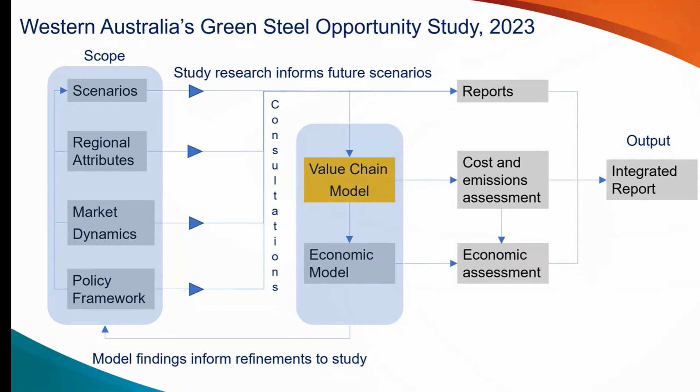We needed to build in as much granularity as we can in the steelmaking process in our model, as much as practical anyway. If we don't do that, we will not be able to estimate production costs, current fuel usage, potential decarbonisation opportunities, and looking at the emissions reductions within those steps.

So we included the steps that you see in this diagram, all the way up to crude steel making. The reason for us not including finished steel products is that finished steel products are wide and varied, and they were not a focus of this study.

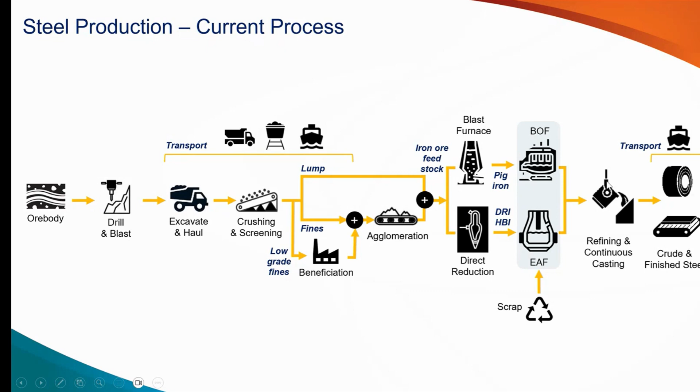Now, with this value chain that you can see, moving from left to right essentially increases the value of the saleable product. And we can think of this as comprising of four markets: mining, iron making, steel making, and transport. The current WA value chain ends at the red line that you see in the screen with DSO and magnetite concentrate exports. In fact, one could say that there's relatively little to no value adding done in WA.

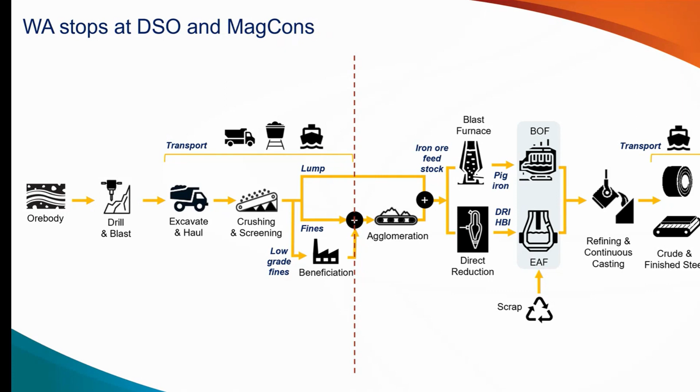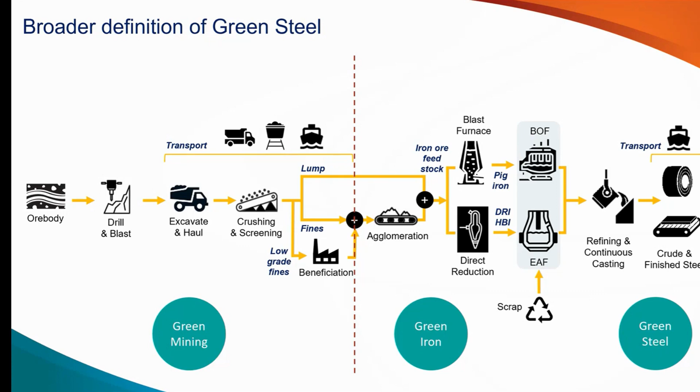For our study, we found it useful to use a broader definition of green steel. To begin with a general or broad definition, green steel is a process whereby steel is produced using renewable energy, that is, with an elimination or reduced use of fossil fuels, such as coal, diesel, oil, and natural gas. Now, having a broader definition allows us to explore as many opportunities as we can for Western Australia, and our broader definition includes green activities in the entire mining to steelmaking value chain.

This schematic here shows how fossil fuel intensive the whole steelmaking process is. These icons that you see there are power, electricity typically generated by gas-fired plants, diesel, and in the case of shipping, bunker fuel. Coking coal is used in iron making, and natural gas is also used throughout the process. Mining, of which we're focused on initially in Western Australia, is very much dependent on diesel.

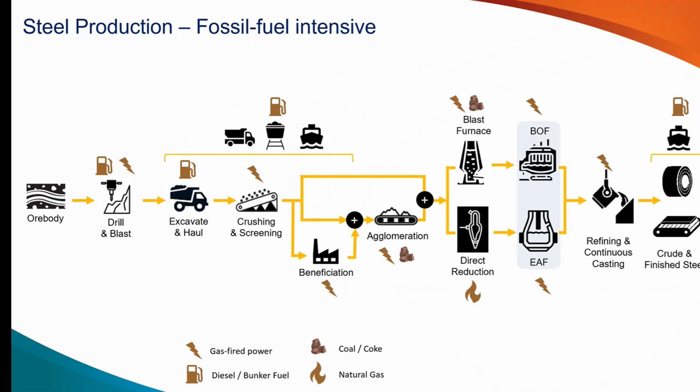You can think of the transportation of ore from the mine to the port, through distances of about 350 kilometers, and that uses diesel. Now, when it comes to iron making, blast furnaces are very much dependent on coking coal, and many parts of the value chain are dependent on electricity, which is traditionally supplied by, as I mentioned, gas-fired plants. Now, with freight, there are long distances in the transport of iron ore from places like Ponta da Madeira in Brazil or Dampier, and they use bunker fuel.

Now, this chart will be repeated in Dave's part of the presentation a little bit later, but I thought it would be useful to mention that the steel industry produces about 7% of global emissions. Here in this waterfall chart, it shows the emissions that come from the entire steelmaking process. An estimate of the blast furnace, basic oxygen furnace steelmaking emissions intensity is 2.1 tons per ton of steel made.

Now, by far, the largest share of emissions comes from the integrated steelmaking part. And within this, the lion's share comes from the use of coking coal in iron making. Now, this diagram also shows how much or how little WA can move the global needle if we only decarbonize mining. Now, the question is, can we make a difference by moving to the right and using our vast renewable generation capabilities and investment capital to help the world decarbonize?

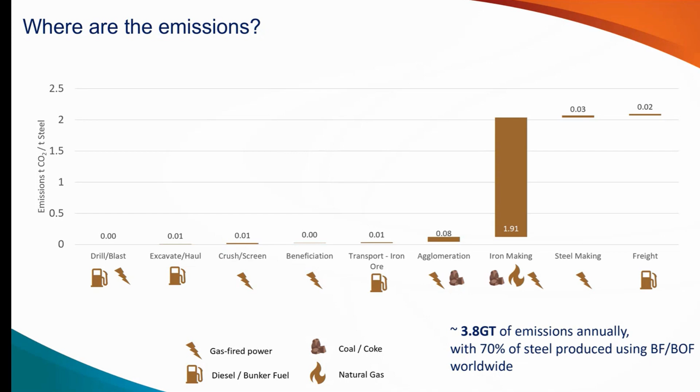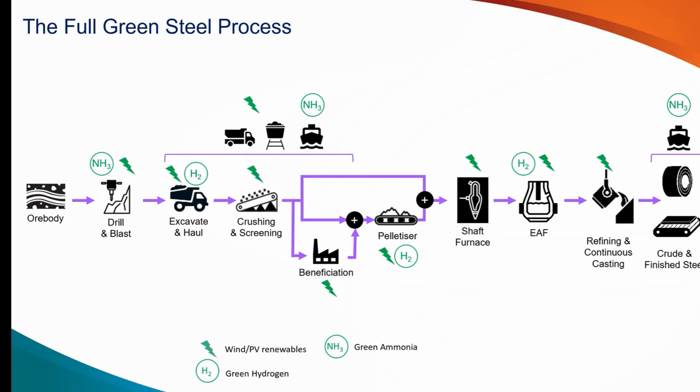This diagram here shows what a fully green steel process would look like today. It replaces diesel, oil, CCGT power, coal, and bunker fuel with electrification, battery electric locos, green hydrogen, and green ammonia. Now, do note though that some of the TRL, technology readiness level, is mature, but others are still at the pilot stage, whilst others are in R&D and in the stage of research and publications in scientific journals. So if we are able to do this, this is what the green steel process will look like.

In terms of geography, we focus on the Midwest and the Pilbara regions of the state, simply because the ore types differ and distances to port differ, and also current investment projects differ. Now, we also focus on renewable power, energy, and that's an input to the model. And finally, the model has a capability to do some scaling depending on how big or small a mine we're looking at, or whether we choose to produce mining only, or steel or iron.

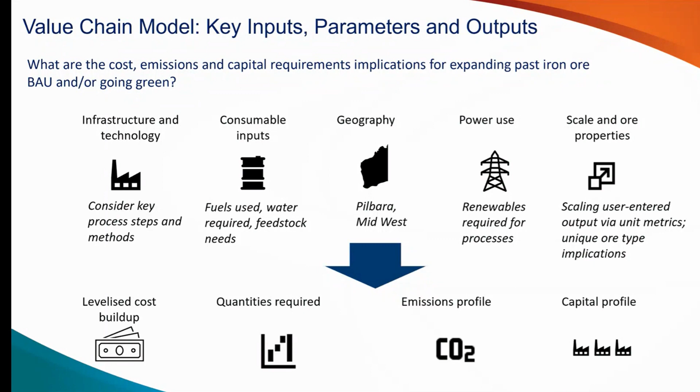And then that input set goes through the model engine, whereby combined with things like energy cost and a satellite model for renewables, we get the outputs. And it is the outputs that allow us to do our scenario analysis, whereby at each step of the value chain, we can turn off fossil fuel and turn on green powered fuels, and then we can look at the cost it would take to make that transition and the emissions saved.

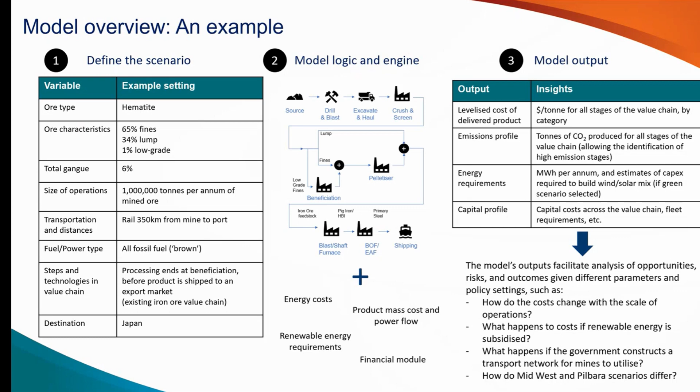So that's a little bit about the setup of the model. We can get into it in more detail perhaps a little bit later, but I hope that gives everyone a sense as to what the model is capable of and how we could use it to analyze the scenarios. Thank you.

Yes, thanks very much, Ken. That was a good overview of the model, and I just wanted to add that it's not meant to cover every single scenario you could do for green steel, or for brown steel making for that matter, but certainly it covers the main process routes, and therefore by concentrating on those main routes gives you interesting insights. So thanks very much for that.

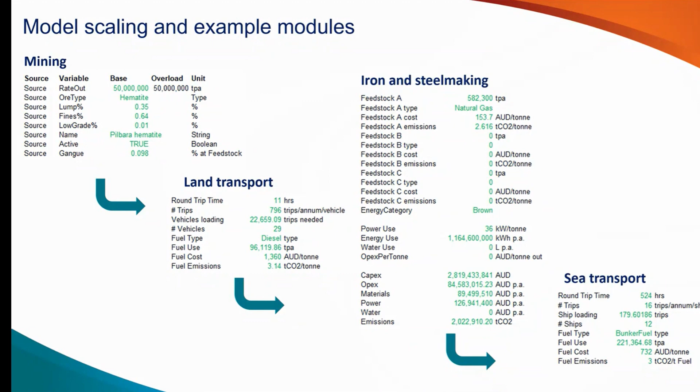So moving straight along to the first slide of the scenarios and the pathways, and just to go over what Ken was saying, the global iron and steel industry accounts for 3.8 gigatons of emissions yearly, which makes up over 7% of greenhouse emissions by industry, and that averages, for every ton of steel produced, 2.1 tons of CO2. So it's one of the most intensive industries, apart from alumina processing and cement. It's number 3.

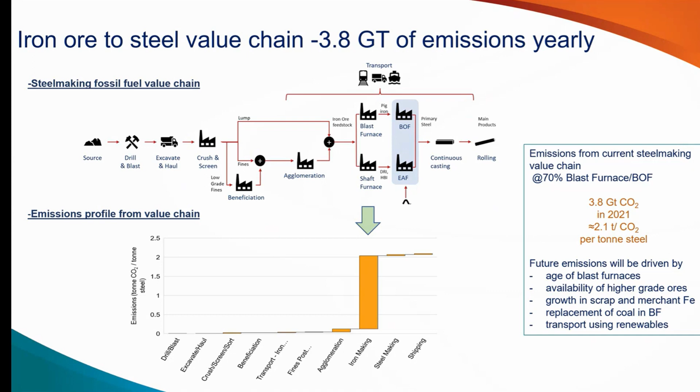And so emissions from steelmaking largely occur, as Ken pointed out, from coke and coal used to make pig iron in a blast furnace, and over 70% of steel is made in the blast furnace and BOF combination. There are other pathways which also use fossil fuels, and also electric steelmaking, which also currently uses fossil fuels. But the process route that we considered was the blast furnace BOF route.

And the orange line represents lumps, and then above that the orange hash line is the possible loss of lump demand, which could be taken up by other products, either higher grade products or products such as pellets. So at-risk demand is estimated to have a reduction, if we do nothing, of course, of 313 billion Australian dollars. That's an average decline of 11.2 billion dollars per year. And so in terms of jobs, that's more than 1 out of every 2 jobs currently in the industry.

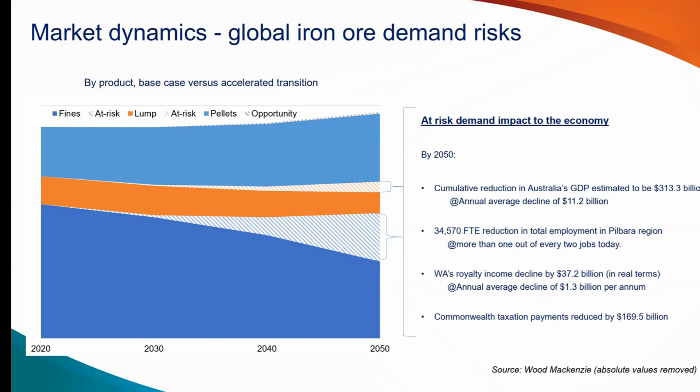But most of the other inputs, such as scrap addition, were fixed. We had a linear curve for the EAF to account for the use of HBI and scrap, and there were certain fixed limits on the energy use and the ore use in the direct reduction process. So it's a linear model. We didn't account for heat and mass balances other than empirical and linear calculations. So these were the assumptions for the green steel model.

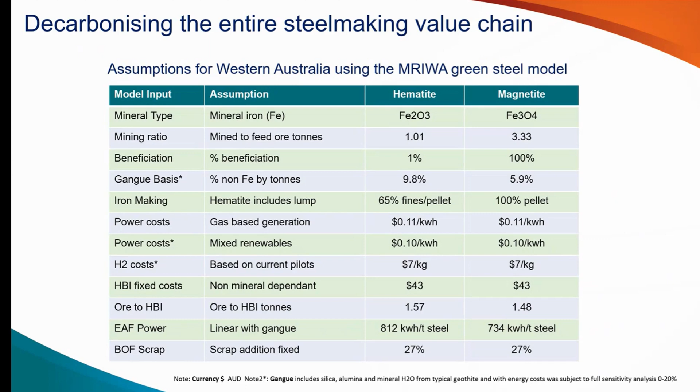So the number you see in red actually is hematite, and the number you see in green is actually magnetite. So for green iron ore mining, the range of emissions is 0.03 for hematite direct shipping ore, and then up to 0.16 tonnes of CO2 for magnetite. Now, this, of course, is just a generic operation. There are other operations with lower yields or higher yields, and or different amounts of processing or different amounts of haul distance, etc., which may be lower or higher than that. But in relative terms, it gives you a view, and the first part of the value chain is covered by that 0.03 to 0.16.

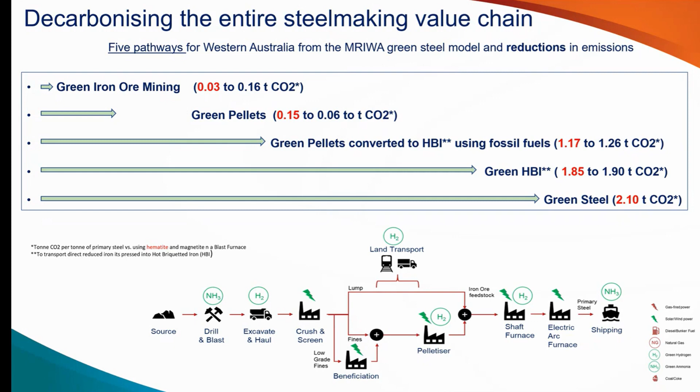And then because you've invested so much carbon into the iron making step in fossil fuels, you actually don't need much to convert. You can use the existing carbon to convert to steel, though in the steelmaking process you do get that evolution of the carbon that you've used in the iron making process. In the green scenario, we're spending more energy in the agglomeration and the preparation process, but the iron making is actually higher because of the use of hydrogen in terms of levelized cost. And then your steelmaking cost increased because of the EAF cost.

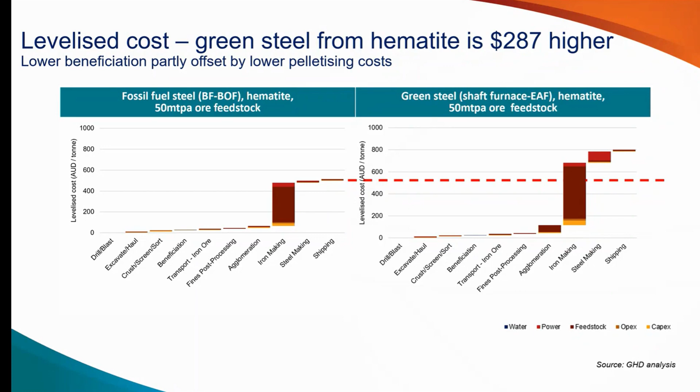I do have the magnetite case. Yes, this is the magnetite case; I've skipped the slide. So this is green steel using magnetite. It's slightly less expensive actually to go to the final step, and that's due to the lower steelmaking costs, because magnetite has less gangue, therefore the power requirements in steelmaking are lower. So it gives you actually a lower cost in the long run using magnetite, using green steel.

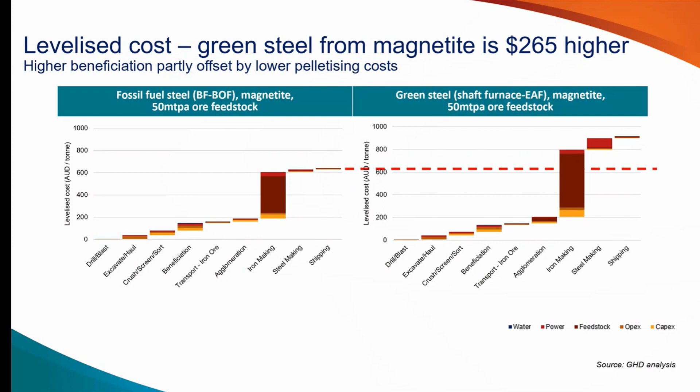The next set of results I'm comparing, I've just gone straight to magnetite using the iron case. So the first step is fossil fuel using a blast furnace to make iron. And during this processing, we're assuming that you make iron and then ship the iron. And you can see that going to green HBI is actually a significantly lower cost option than the existing pathway. So it's only the final EAF step which is adding the extra cost in these pathways. So the higher cost of green pellets is offset by lower iron making cost in HBI using fossil fuels.

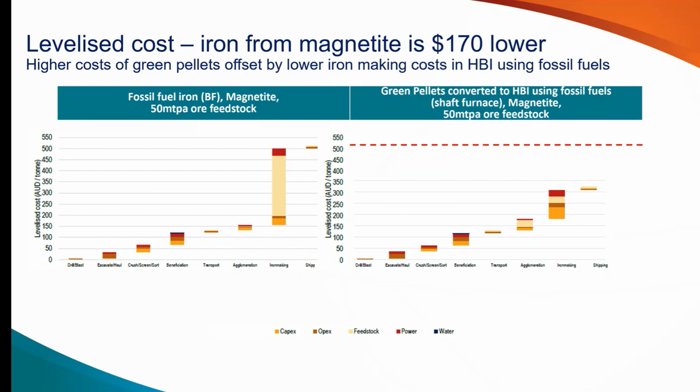So that's a bit hard to digest, and hopefully you can look at those costs in more detail in the green steel report. We've actually listed those costs in table form, I think, in the report as well. But I think the sensitivity analysis is quite interesting.

And if you look at green iron ore pricing, looking at the renewable power price that you would need to break even fossil fuel mining versus green mining, you actually get cost of renewable power around that 9 cents, which is actually the current cost, or maybe the current costs are lower than this. So actually, in today's renewable world, if you could generate enough power and you already had existing solar panels, you could actually, on a cost basis, break even to the fossil fuel process.

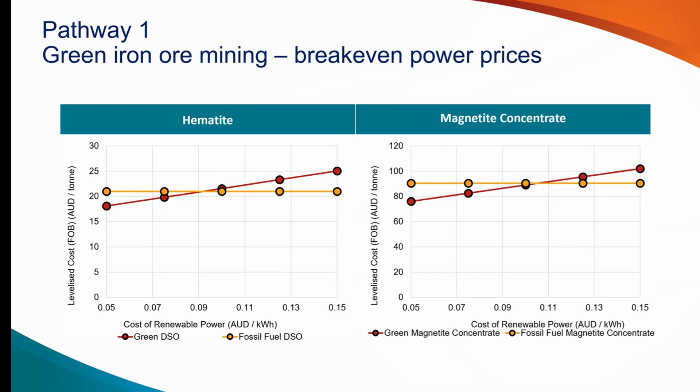And in magnetite, it is slightly higher because you've got more processing, but it's still in that 9 to 10 cents range for green iron ore mining. So the next slide is the break-even prices for magnetite for all of the pathways as a comparison. So as we just said, the renewable power break-even is around that 10 cents, but we also looked at pathway 2, which is green pellets, and the break-even cost for hydrogen for green pellets was about three Aussie dollars per kilo. If we go down, we can see that the break-even price for pathway 4 is making green iron, and that's around the $4 per kilo.

And then going through to green steel, the cost of hydrogen would have to be just over $3 for us to break even on a cost basis for green steel. So the current, I think the hydrogen pilot plants we have at the moment are $7. I think the model assumes $7.50, but there are predictions that the actual hydrogen cost would come down towards that $4 or perhaps $3 per kilo with emerging technologies and as hydrogen is produced at larger scale.

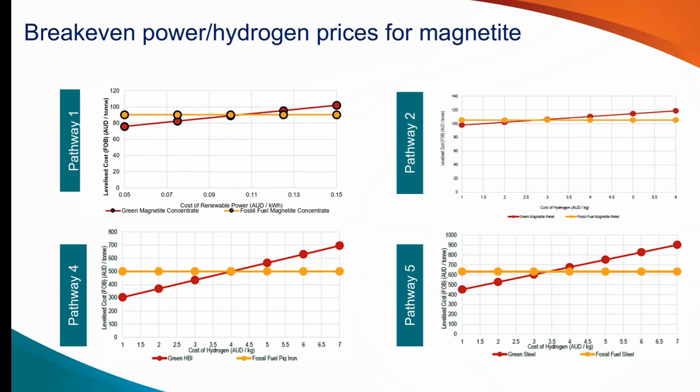So the other sensitivity we looked at was the gangue, which is the impurity level of the iron ore. And so the model looked at, I guess, from 0 to 30% gangue, and gangue by definition is everything that's not iron. So in our definition, to simplify the model, we included mineralized water and silica, alumina, etc. And in that full range, if you just mine the ore at a certain gangue, obviously if you're going to go to a pure iron ore mine and a pure reserve, you actually lower the cost of green steel. And you can see by the solid line, this is the cost with mine gangue.

However, you do have the option of beneficiation, and we use the standard beneficiation curve. Obviously, beneficiation will take energy. Beneficiation is upgrading the ore by removing some of those impurities, but that generally takes a certain amount of energy. And the energy curves for beneficiation are shown. So at very high impurity levels, by beneficiating, you can actually bring down the cost quite substantially.

But that gets harder and harder as the mine grade gets better. It's harder to remove those impurities, so the cost actually starts to break even, and the dotted line shows the average gangue where actually it's not much point going further with beneficiation in terms of levelised cost, because you're actually not changing the cost. In fact, if you go below 10% average gangue, you're actually increasing the cost of steel by beneficiation. So this dotted line comes in at just under 13% total gangue, and that's equivalent to about 63 to 64% Fe, depending on the gangue ratios.

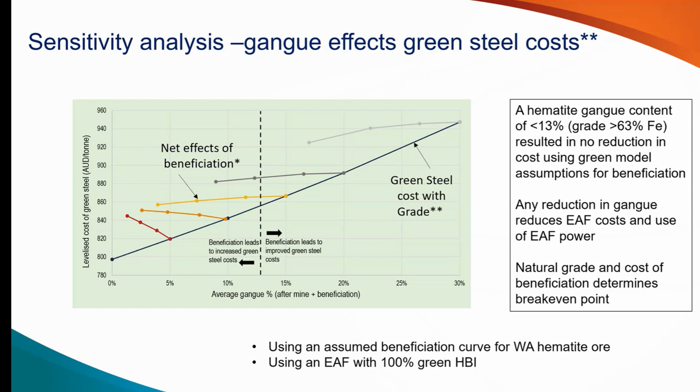So getting towards the conclusions, thanks for bearing with us. So in terms of the model, just to summarise, the levelised cost for green steel, unfortunately, is higher. It's 265 to 287, which is about 40 to 50% higher than the existing steelmaking pathway. But this is fully green steel.

And the levelised cost for pellets, and then using HBI with fossil fuels, which includes natural gas, actually reduces the levelised cost by $175 per tonne of iron produced. So that's quite a substantial saving in cost. But of course, you've got the capital in building the plant, and the model and report looks at that capital. The emission profile for fully green steel is lower by 100%, of course, and typically 2.1 tonnes of CO2 per tonne of steel.

And the emissions profile of using green pellets with HBI and fossil fuels is 65% lower at 0.85, which is quite significant, and is a largely known technology. Break-even power price is around that 10 cents per kilowatt hour, and the break-even hydrogen for green iron is significantly $4 per kilo, which is a reduction from the current pilot plant Aussie cost, but certainly within the realms of

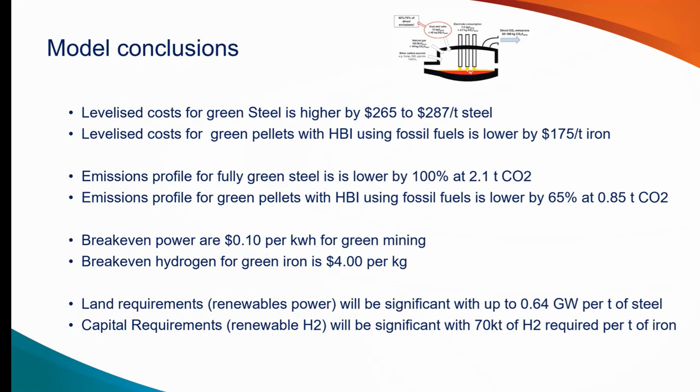So stepping beyond the model a bit, I won't go through the whole green steel report, but using the model we were able to get a lot of insights into the iron ore and steelmaking markets and what's needed for the global steel industry to decarbonise. The reports are online, and the model we're hoping will be online soon as well, so you can have a look and use that if you like. It's an easier way to read the report if you can use the model side by side.

The steel industry is going to focus on the quality of iron ore feedstock, given that's I guess the easiest and most straightforward way to reduce their emissions. An opportunity exists for WA to supply new iron ore products, which can reduce those downstream emissions. For example, HBI can reduce the emissions in iron making by up to 65%. Green hydrogen and renewable energy are key enablers for the industry to decarbonise. However, the investment requirement in current technology is significant and shouldn't be underestimated.

Further research into the use of West Australian iron ores in steelmaking is needed. Some of the assumptions we use are just the current technology. If you could reduce the amount of energy, for example, in beneficiation, or understand better which ores can be used to make DRI in a less intensive way, then this will also help decarbonise the industry.